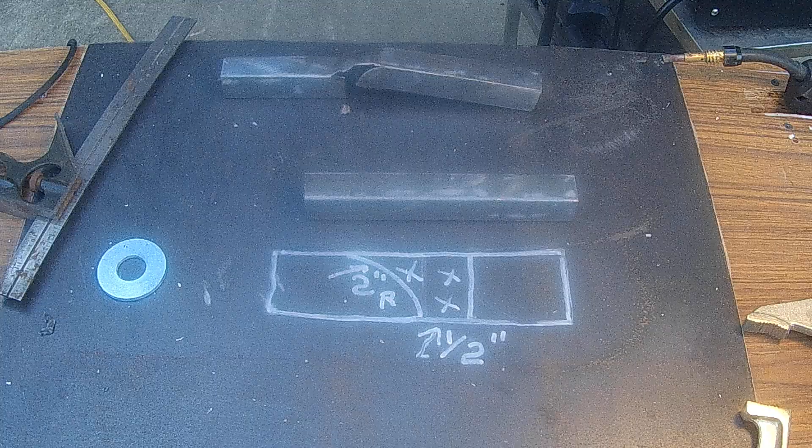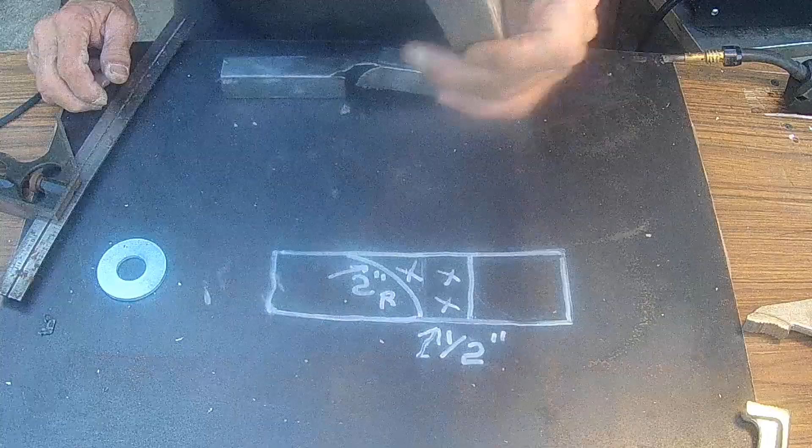Alright, I'm back. In this video, I'm going to show you how to bend a piece of square tubing without a die.

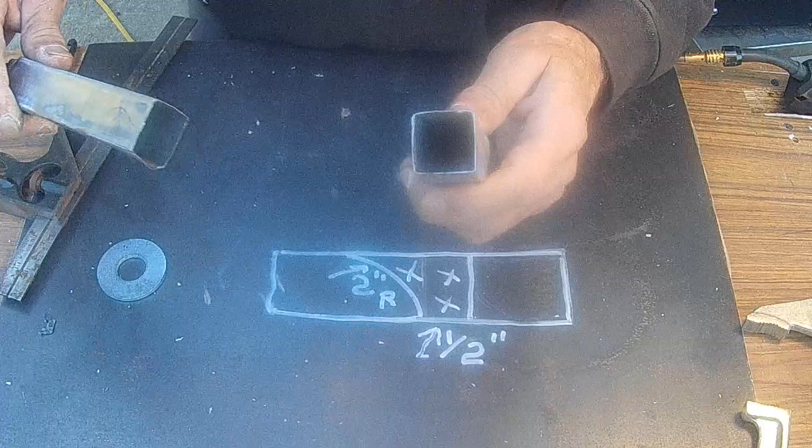I'm making a project and I don't want an opening. Normally you take two pieces, weld it like that, and you get an open seam here, or you do it the other way and still have an opening. I don't want an opening on the project I'm making, and I don't have a bending die for square tubing. I'm not going to spend hours making one on the lathe and then building the whole press for something I'm not going to use that often, so I found an easier way to do it.

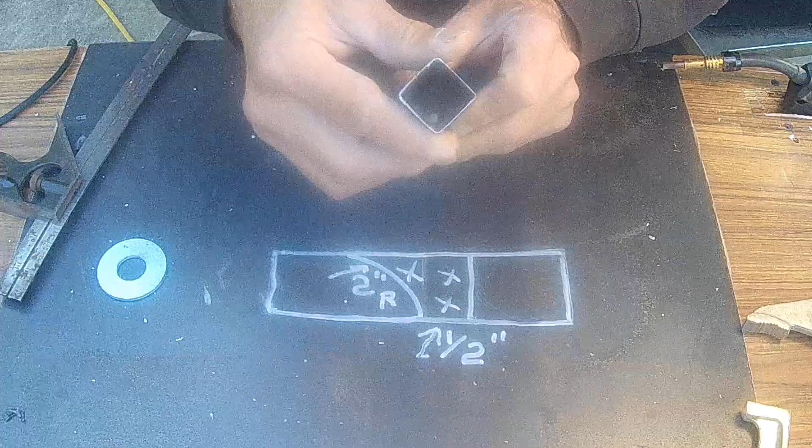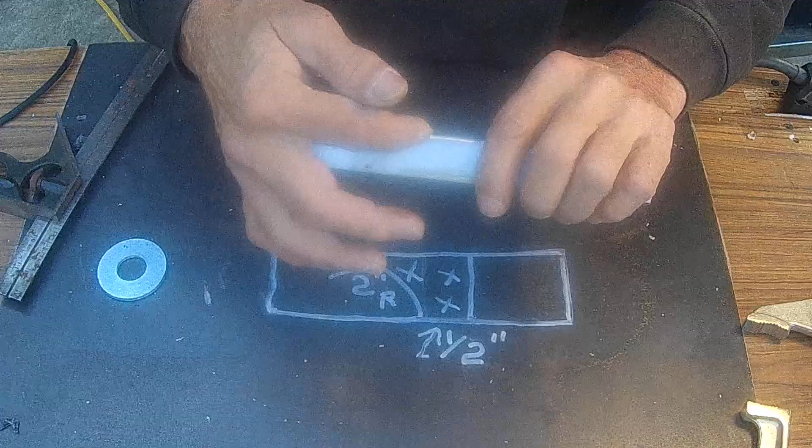I drew it out on the table here. This is my square tubing. It doesn't have to be square - the most important part is the thickness, not the width, because you'll see when I make my cut. This one is 1 by 1 and it's 20 thousandths thick. Now this could be 3 inches wide, 1 inch this way, and it would still be the same process. It goes by this determination here - if this was 2 inches, you'd make it bigger accordingly.

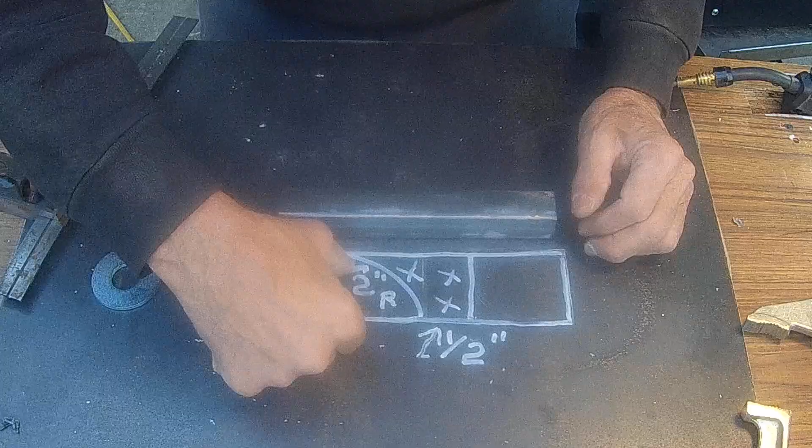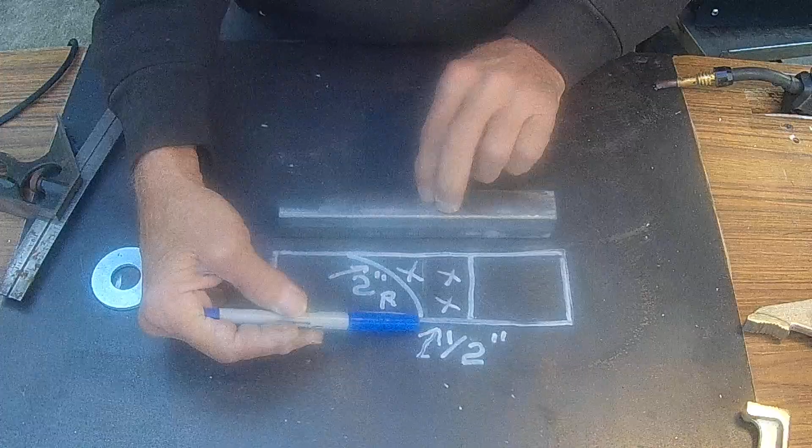Let me show you here. What I'm going to do is put in a 2-inch radius. What I've discovered is, if it's a 1-inch piece across, you just double it, which gives you a 2-inch radius. So you come in here and put a 2-inch radius on it, and since this is 1 inch wide, I'll take half of that and move a line back a half inch away. That'll give me a good starting point, and you'll see what I mean when I start making it. So I'm going to start by establishing this line here, drawing it all the way around.

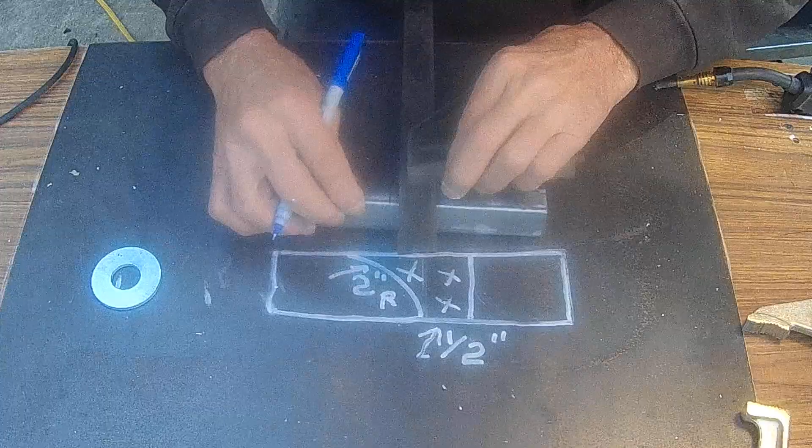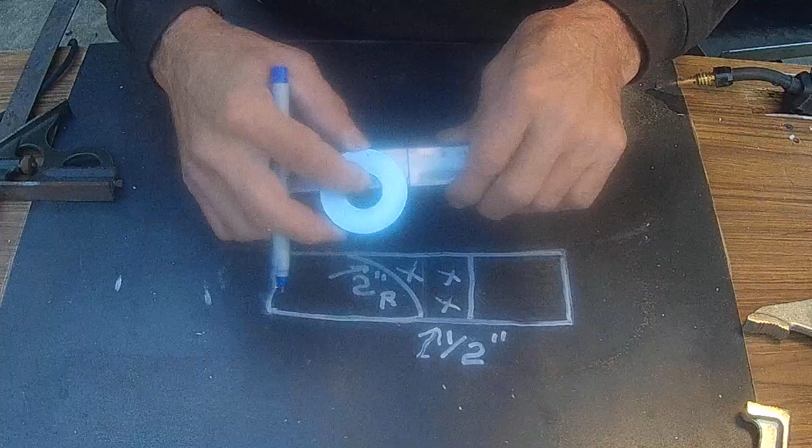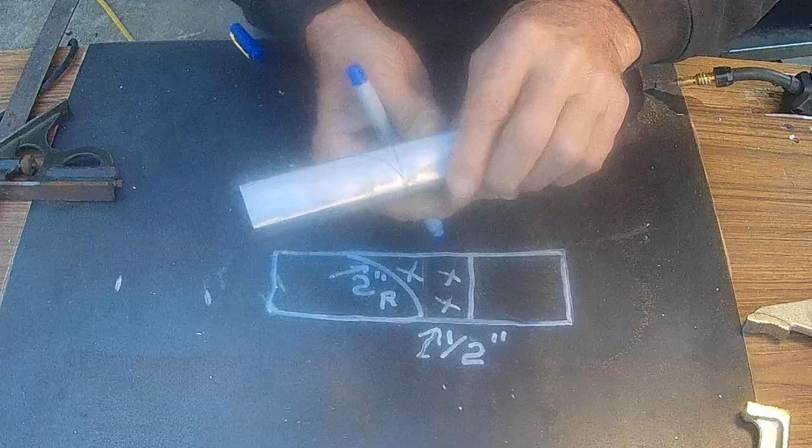The reason I drew this line is it gives me a place to put my radius. Now I'm going to line the top of my washer up - this is a 2-inch diameter washer - with the edge here and also this mark here. And I draw my radius like that. Hope you can see the radius there. Then I go to this side, turn it over, and do the same thing here. Now I have my radius here, and also my radius here.

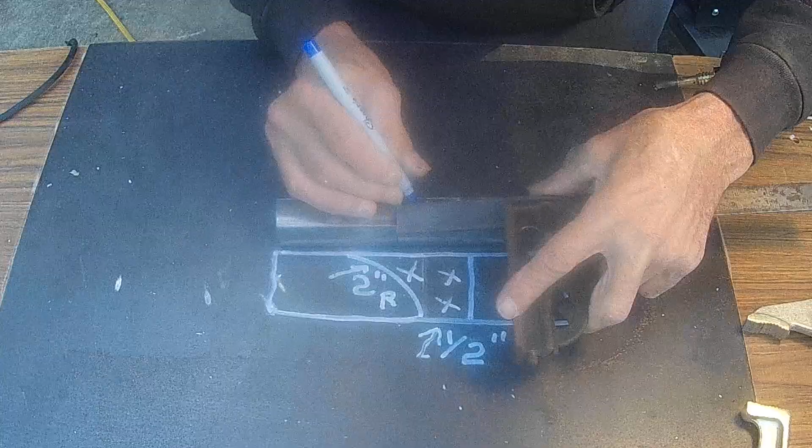Now what I want to do is back off a half inch from that line there, then draw a line. You do this on 3 sides - this top here does not get cut. Here's your radius on both sides, but you do not cut this top. So I've got my half inch line here, and now I transfer it around on 3 sides.

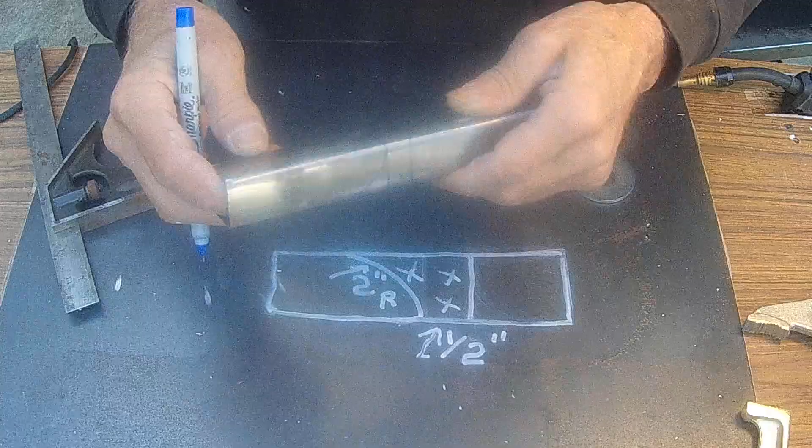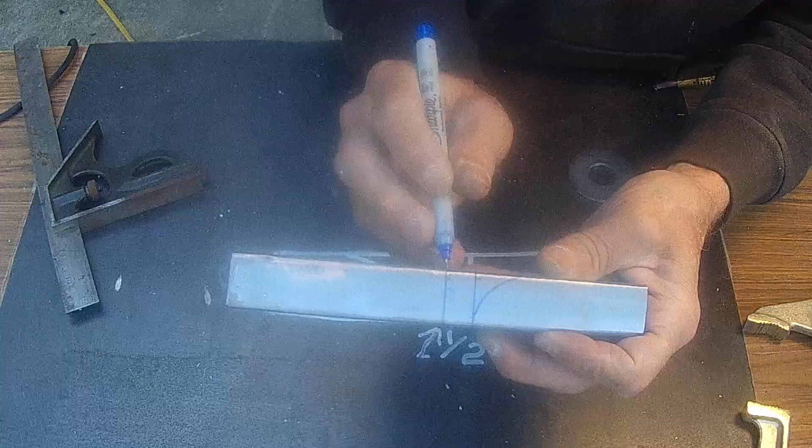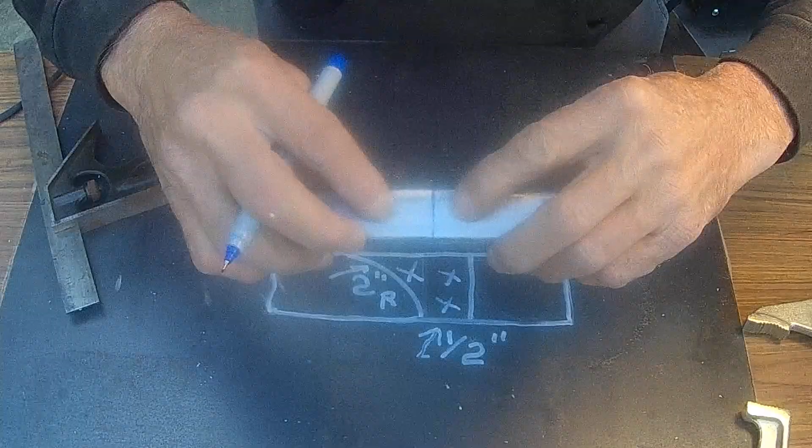So what I'm going to do now - I hope this is showing up - this edge right here, you're going to cut this off. This is all going to be cut out. Same thing with the bottom and this side here. Then I draw my line from the radius over to here. I am not cutting the top. Now this is going to be the...

Now when you come in here to make your radius, you want to make it as good as possible - you don't want to hack it up, and I'll show you that. I'm going to take my Dremel now and cut everything, so you may want to turn down your volume.

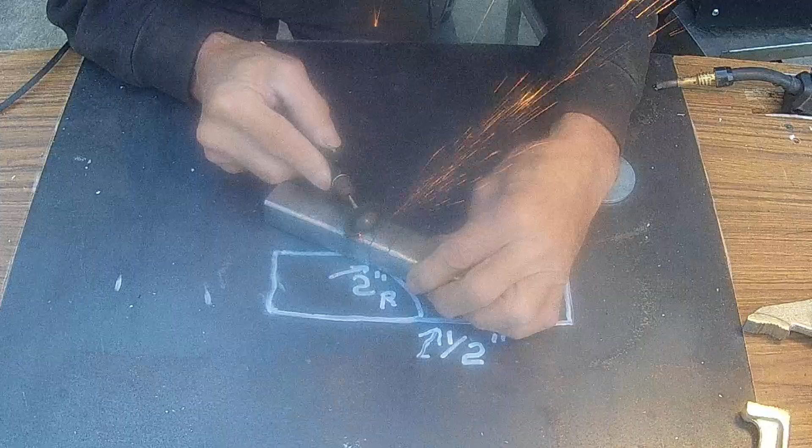And do the same thing with the radius on this side here. I have the radius cut on both sides. Now I'm going to cut this section here out.

Alright, so now I have the radius cut in here, and I also have this cut here. Now I have to make one more cut connecting the two radiuses. I'm going to cut this here out.

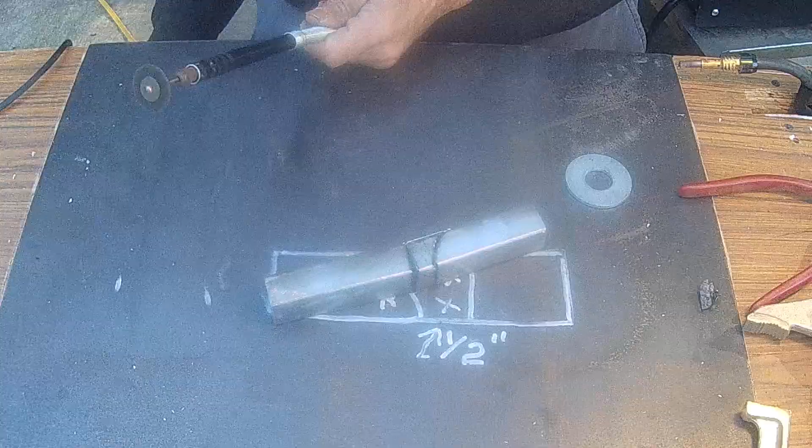Okay, now I have it like this. So what I do now, I do it backwards. You can see this is starting to wrap around the radius here. And then it comes in like that.

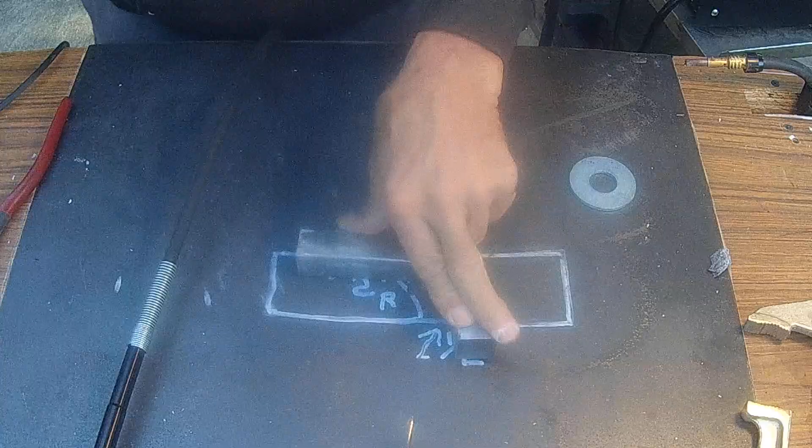Normally, when you're using a bending die, you're going to get a radius that's going to be something like this, a big radius. With this here, I just have a small radius versus a big radius. So that's one reason why I'm doing this rather than a radius die or a bending die.

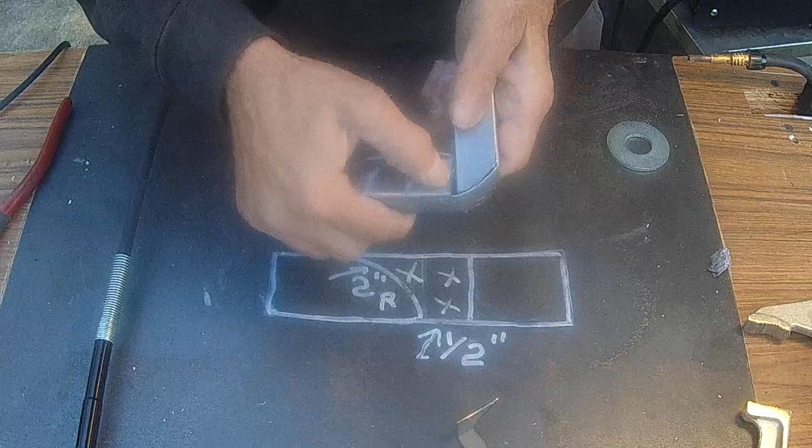And I messed up, I went too far on this side here. On this side, it's not too bad. What I'm going to do is tack it.

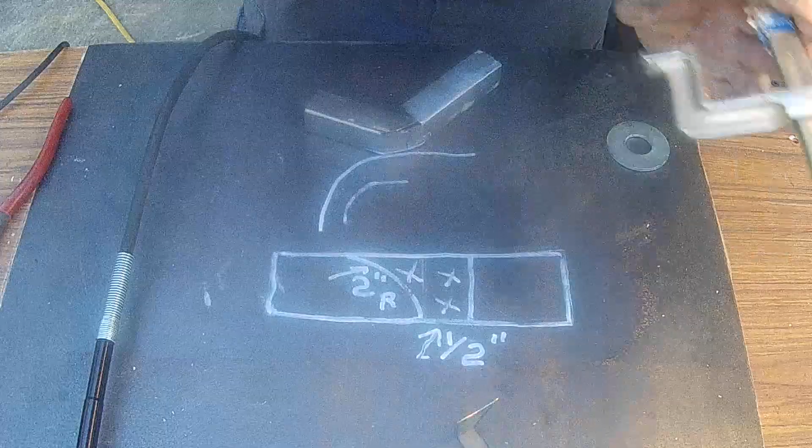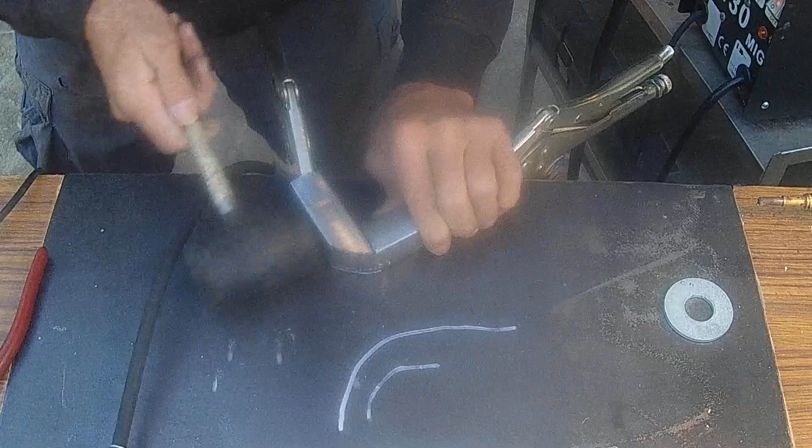I can guarantee I'm going to blow holes through it because it's only 20 thousandths metal. So I know I'm going to blow a hole through here, but I'll just show you anyways, give you an idea. Double check, make sure the camera's in, so you can see what I'm doing. That doesn't look bad, alright.

Well, like I say, I'm going to tack weld it. I have my welder set on low 1. This is that 130 MIG flux core welder that I bought. I got it set on the lowest possible setting, and my wire feed is at 1. They say I'll be surprised if I don't blow a hole through it, but I'll give it my best shot.

This piece doesn't mean anything. I'm going to be using 1/8 inch tubing in the future, and I would not use the Dremel to cut my radius on thicker stuff. I'll use my cutoff grinder. I didn't want to waste a lot of time grinding it for something I'm not going to use. This is strictly for educational purposes, I guess. So let me tack this up.

You come in here and tack weld the top, and then you take your grinder and grind it down. Same thing over here, say this is 20 thousandths metal. I knew I was going to blow holes through it, but I just want to throw it out there so if somebody wants to make some bends in their project and they don't have a bending machine, then you can do it this way here.

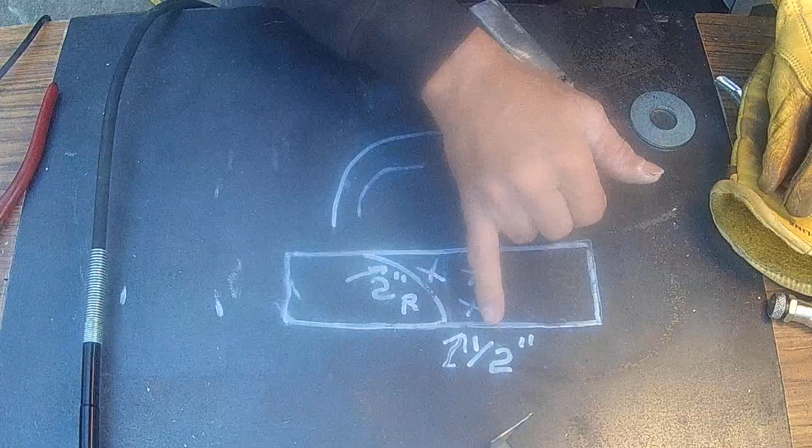Now you can do 45s, but you'll just have to figure out this step back for a 45, which won't be a 1/2 inch. It'll probably be more like a 1/4 inch, something like that. You have to play around with it if you want a 45 or any degree angle.

But to get you started, I move 1/2 inch back, and that's only because this is 1 inch stock. This way, if this is wider, then I'd move different. If this was 2 inches, then I'd use a 4 inch radius here.

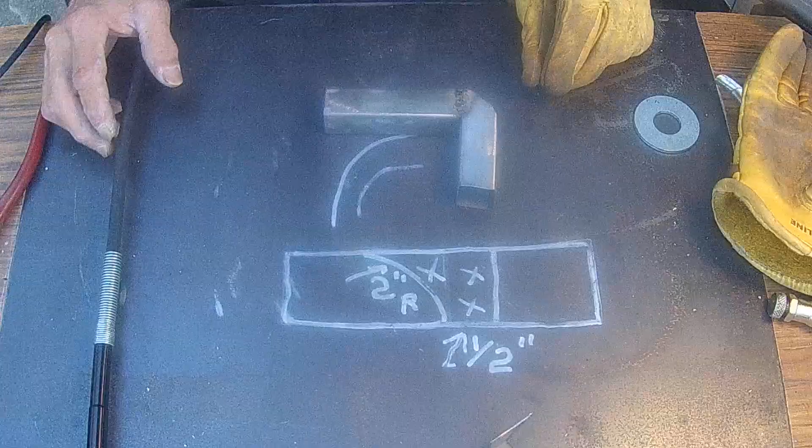Well, I'll throw this out here, and hopefully that'll help somebody. As always, my videos are free.